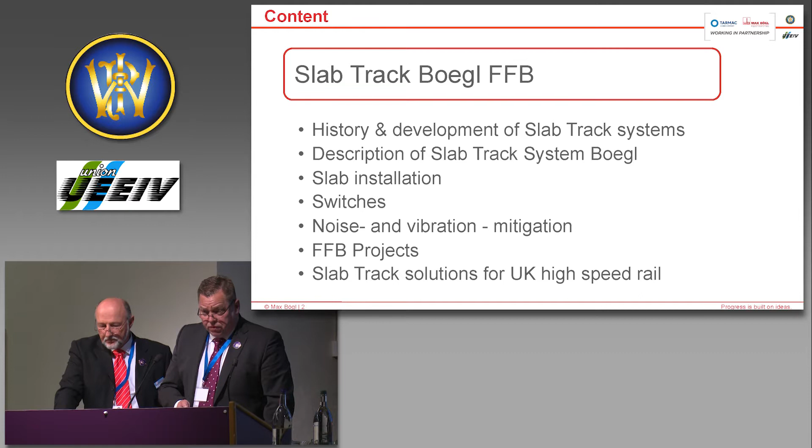Thank you, Steve. Good afternoon, ladies and gentlemen. History and development of Slab Track.

In the 1960s, the German railways thought about riding a little bit faster, but having better comfort and maybe less maintenance. So this was the start of development of Slab Track.

In 1972, the first section was built quite close to Rheda station, and it was a cast-in-place system based on sleepers filled with concrete.

The development was carried out by some companies, and five years later, in 1977, a demonstration track was built quite close to Munich on the line between Karlsfeld and Dachau. Different systems, some with sleepers and in-situ concrete, and also systems with precast elements, were tested.

Here we can see a very big picture. It was the section of this demonstration track built with precast elements, in a length of 430 meters. This is a picture after 15 years of use.

Quite a lot of other systems during this time have been renewed. This system is still running today, every day used by trains with a load of about 160,000 tons.

And we call it the mother of the FFB system, Feste Fahrbahn Bogl, because with the good experience of this system, the German railways asked Max Bogl, because of their knowledge in precast technology, to take up this solution and the brilliant experience from this test track, to update the system. And the FFB system itself was born.

Integrated rail seats, longitudinal coupling, and maintenance free - the track has worked since now more than about 40 years, with very good performance.

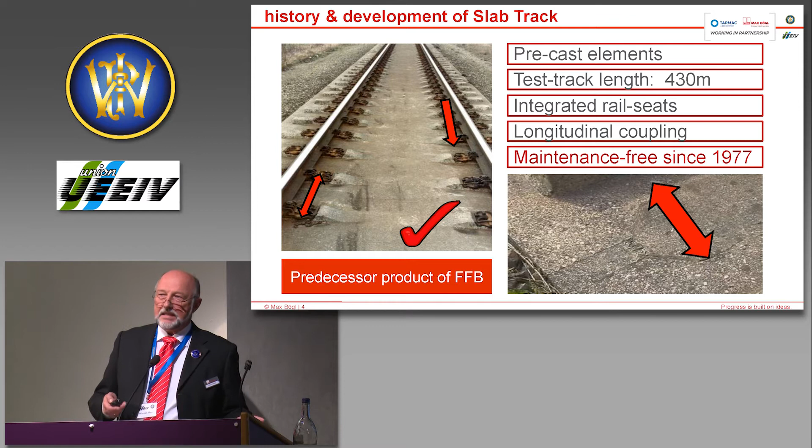And now I want to tell you a little bit more in detail about the FFB system - the description of the slab track system Bogl.

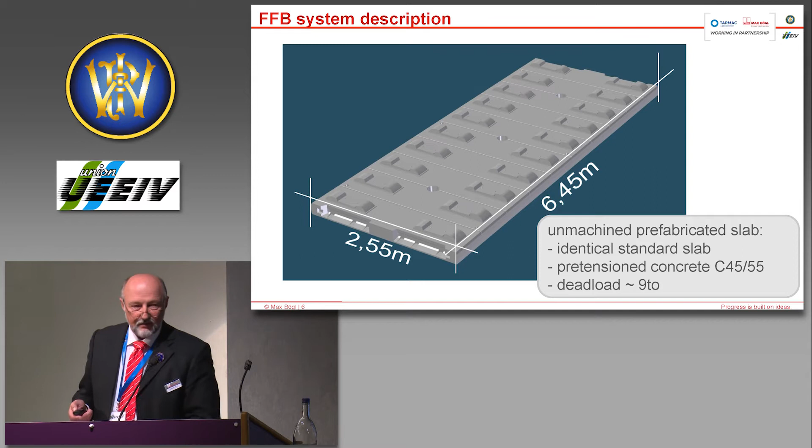The FFB system consists of precast concrete elements produced in a precast plant, with a length of about 6.5 meters and a width of 2.55 meters, with a dead load of about 9 tons.

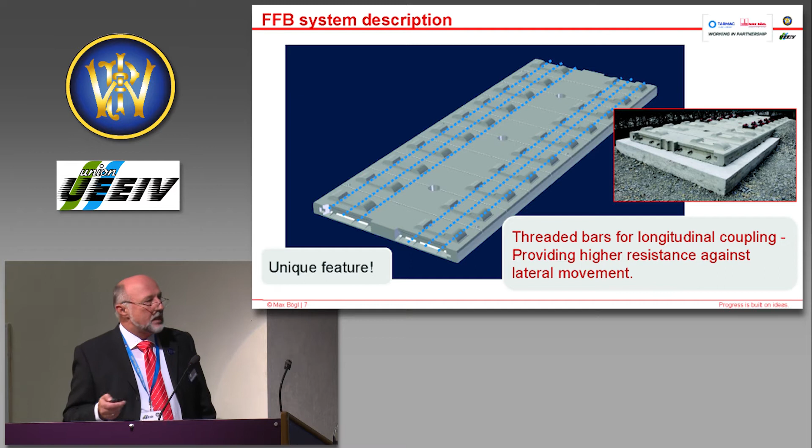As a unique feature, we have the longitudinal coupling, providing higher resistance against lateral movement, which is very important for the long durability of the system. And we have the pre-stressing in the transverse direction to increase longevity and durability.

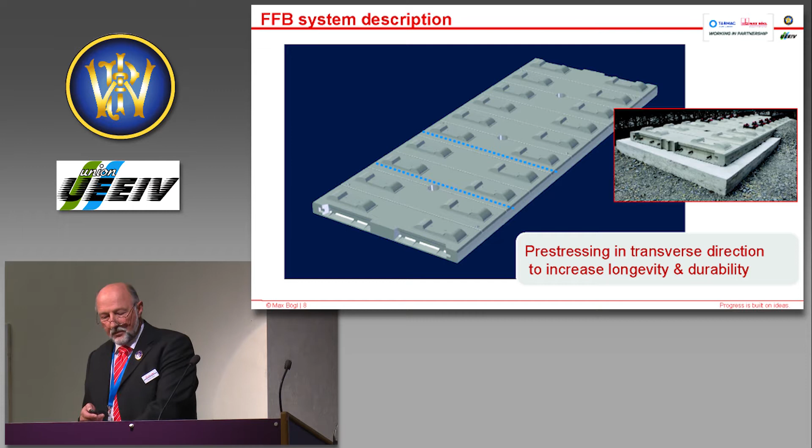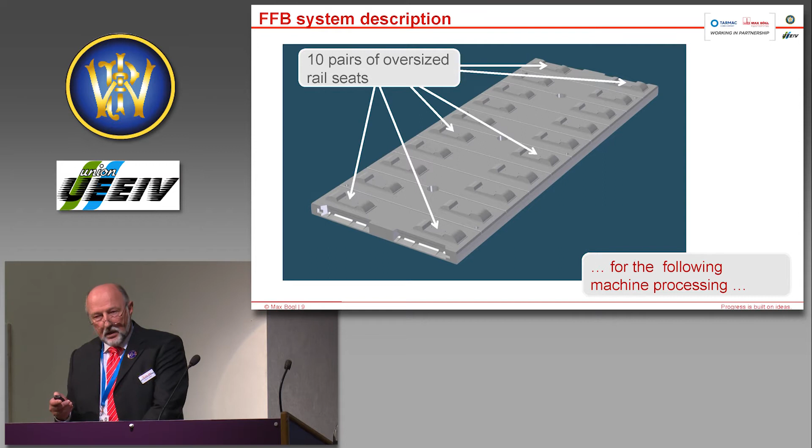Each slab has 10 pairs of oversized rail seats. Oversized because the following process, which is a machined process performed by a grinding machine, will work in this oversized area, which we can see here.

The unique feature is that we do not change the inserts in the mold to achieve a curve. No, we install the curve by a grinding operation. The rail seat geometry after grinding has a shape that exactly matches the track alignment.

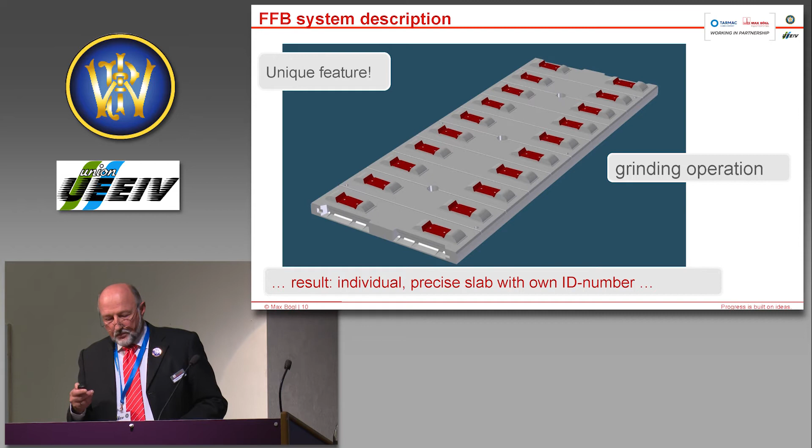The grinding process can be performed by fully or half profiled shape rolls. The amount of material to be ground off varies from a range of 1 millimeter to some millimeters.

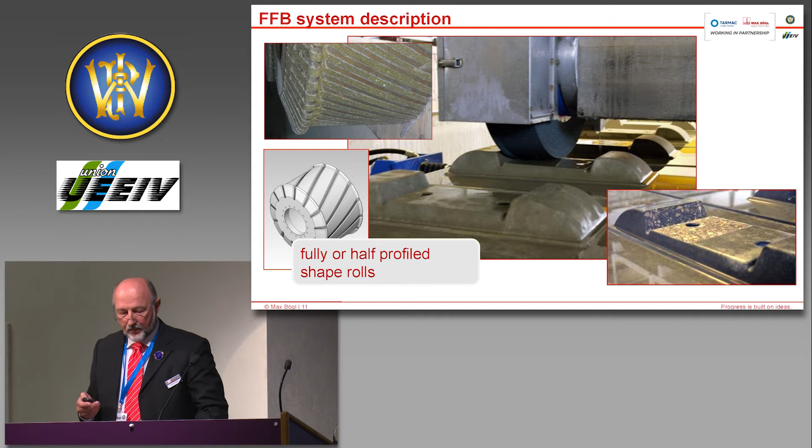For quality control, after grinding, each slab and each rail seat will be measured by a laser scanner and checked to confirm the grinding rate is in the expected range. All the data measured by the laser scanner will be stored for quality control.

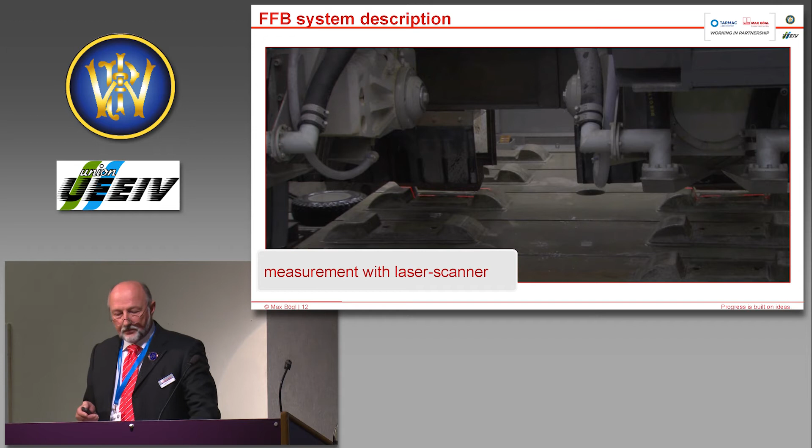Because now we have a unique slab with the geometry of a special part of the track, this slab gets an ID number, and this number will be applied, as you can see here, by a small robot.

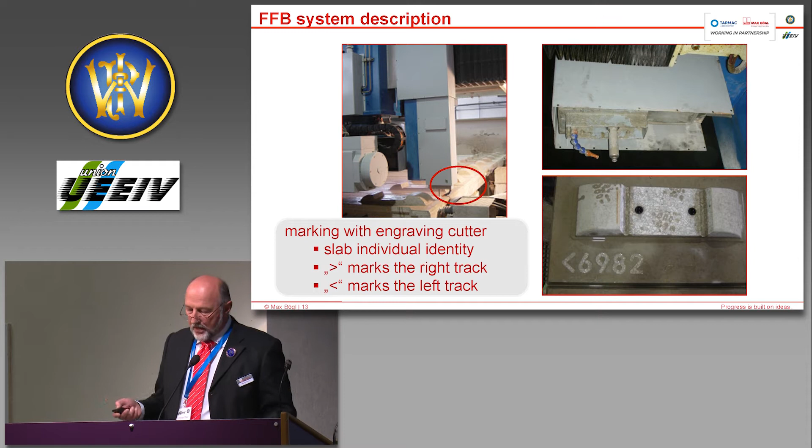But how do you bring a some kilometer long railway line to a segmented track? The basis is the track geometry given by the railways. This alignment will be used in all following processes as a basis.

In the planning process, the track is broken down into pieces with the length of the slabs, and so for each place on the track a slab will be designed. An individual data set is generated in the FFB software for each slab.

The data will be used for the CNC grinding machine and also later for the slab laying and adjustment on site. The data can be stored

also in the BIM model of the railways. So the software of the FFB system can work together with, or be part of, the BIM model of the railways. FFB is BIM ready.

Now, ladies and gentlemen, you may ask yourself if it's only possible to install continuously, starting at one point and going on to the end of the track. No - because of the design segmentation, at each necessary place installation can be stopped and continued after a gap.

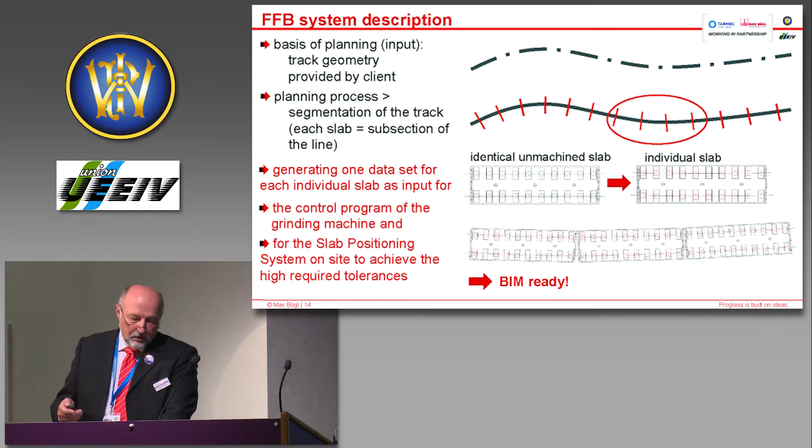For example, because of a bridge still under construction, or for logistical reasons to cross the track for transportation, a gap of 5 to 10 slabs can be kept open, and the installation continues.

As soon as the transport opening is no longer needed, the gap can be closed, and the accuracy will be the same after closing the gap. Everything will fit.

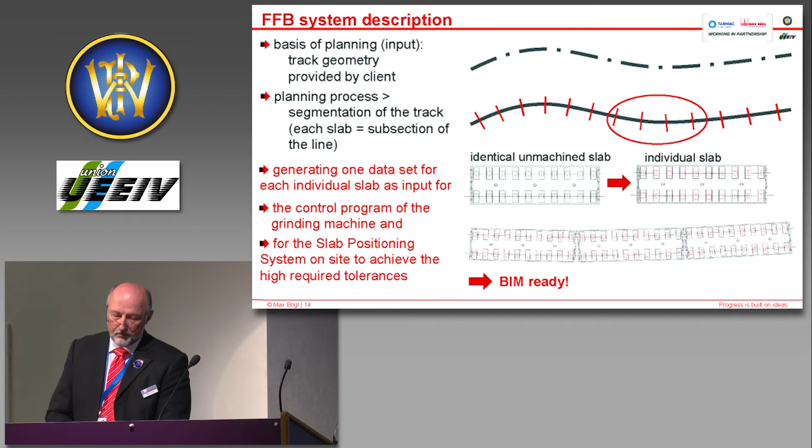Here we have a nice view of such a curve section. We see the polygonal arrangement of the slabs and the continuous shape of the curve ground by the CNC machine. The accuracy of this grinding process is very high.

The performance will be executed with a tolerance of less than 0.3 millimeters. So at the end, you will have continuous support for the rail with the best conditions to ride very fast.

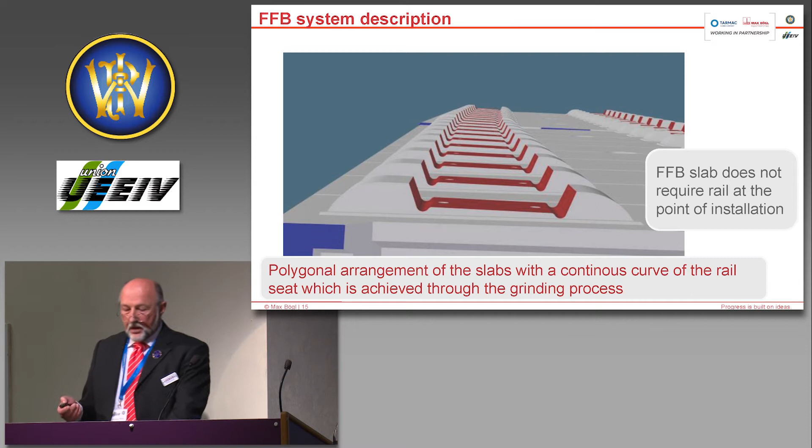Only the fastening system will be installed in an assembly process as the last step in the production before storage. The fastening system for high-speed use consists of dowels installed in the concreting process, the elastic intermediate plate, the steel plate, tension clamps, screws, the rail pad on top, and the angle guide plates.

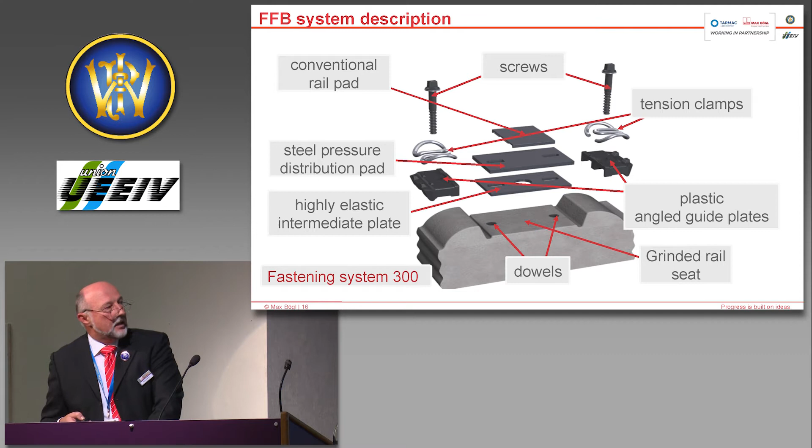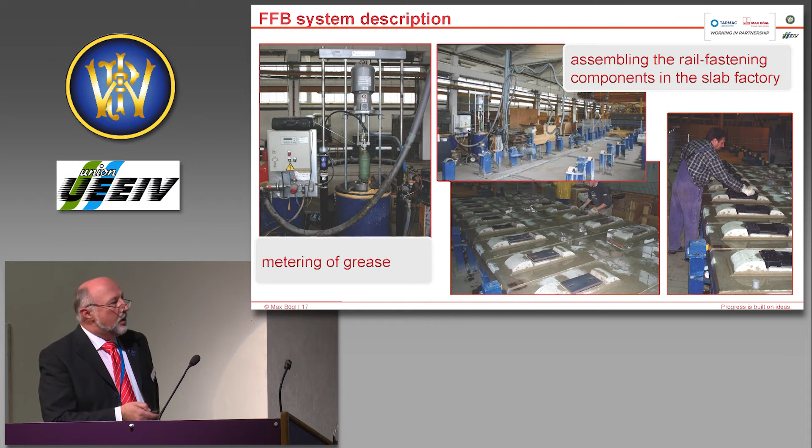This is the assembly process in the plant: the installation of grease as a protection against corrosion. Now the slab is ready assembled and waiting on the storage area for the call of the site.

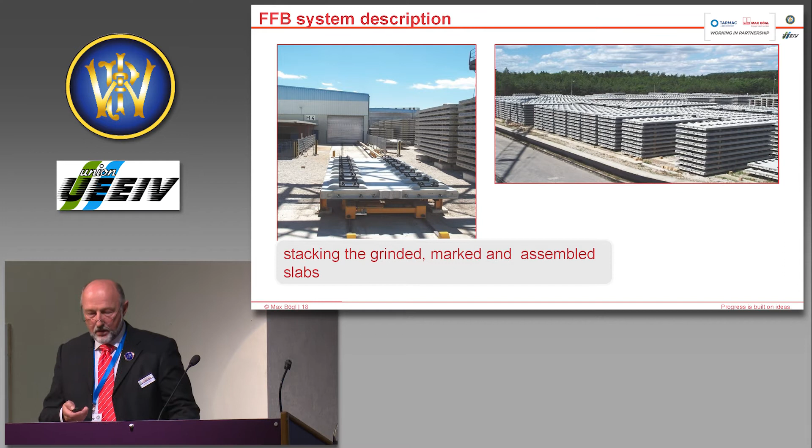The call can, for example, be: in 3 days we need slab number L for left track, 2708, and the following numbers. But this call needs some work before.

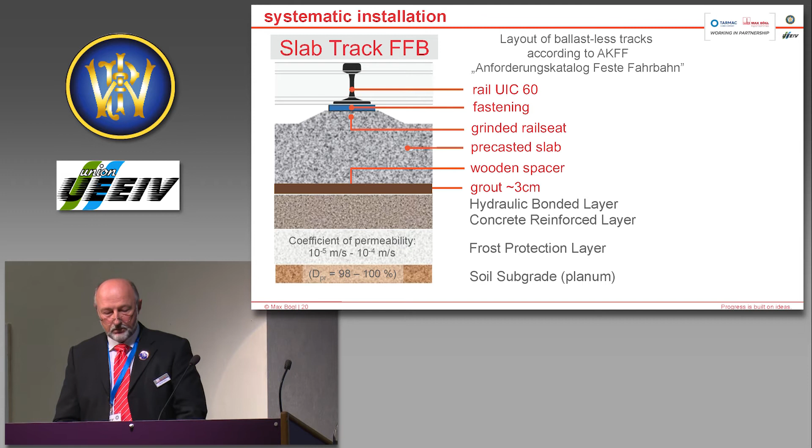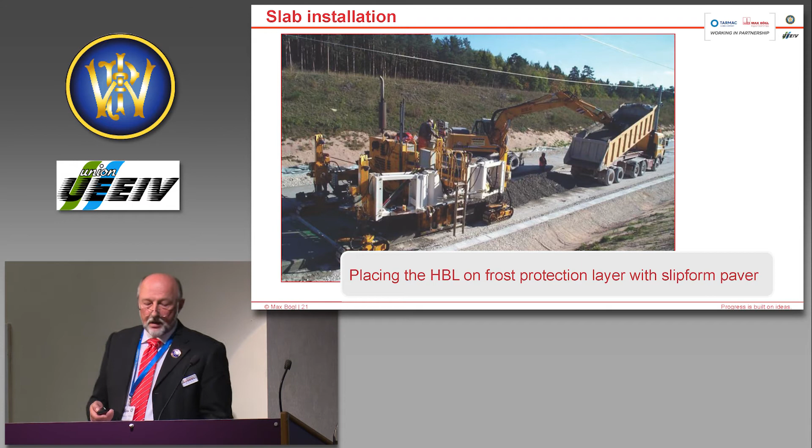And now, as a last step, the rail will be installed. To have a look on the side, you can see the slip form paver installing the hydraulic bonded layer on top of the frost protection.

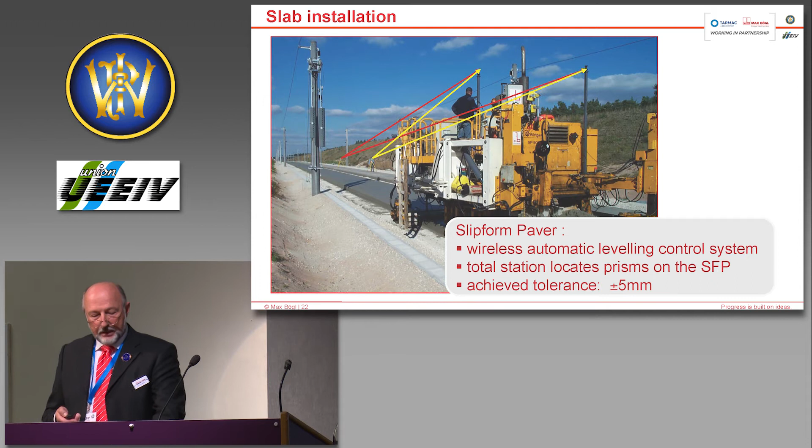And then, after the survey process, the position of each slab will be marked on the HBL, and the gantry crane will lay down each slab at its special place, according to the position plan and the ID number of the slab.

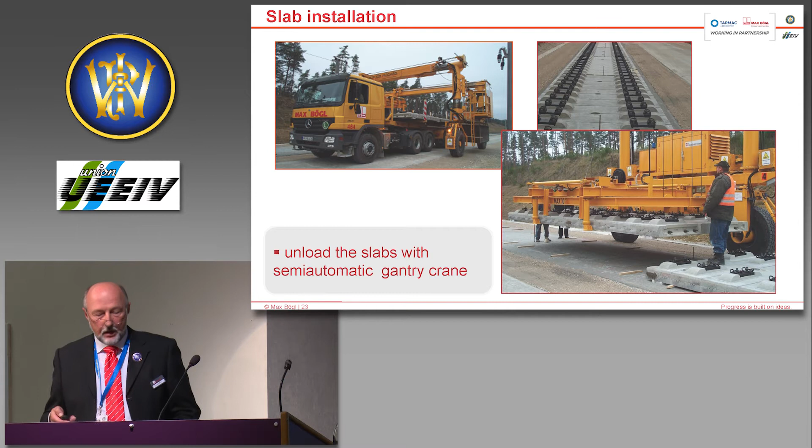A survey team will work with the slab positioning system and a total station and the software behind, adjusting each slab according to the necessary accuracy.

And here we are again in the range of 0.3 millimeters using the data we have stored after the grinding process, so we will have no additional failure in the process. We will start with the track alignment, go into the grinding process, use the accuracy after grinding, and jump into the installation process, always using the same data.

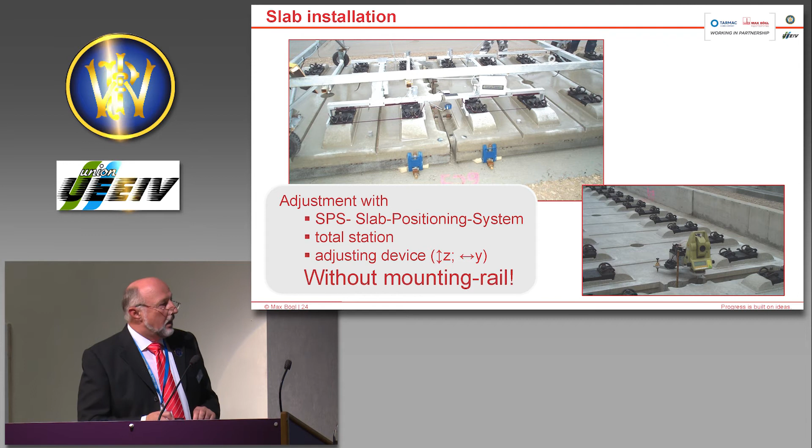To fill the gap between the hydraulic bonded layer and the bottom of the slab itself must be fixed and the gap must be sealed, what we do with a cementitious mortar.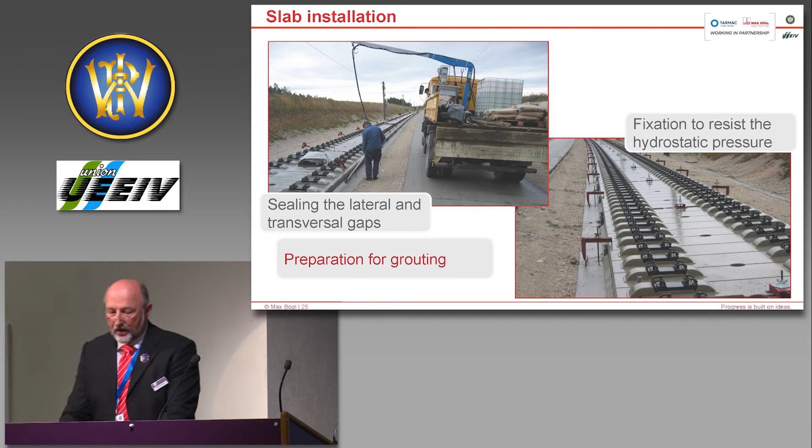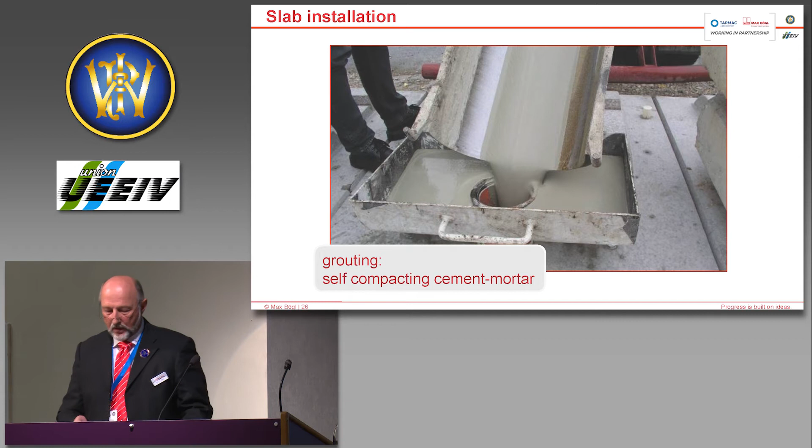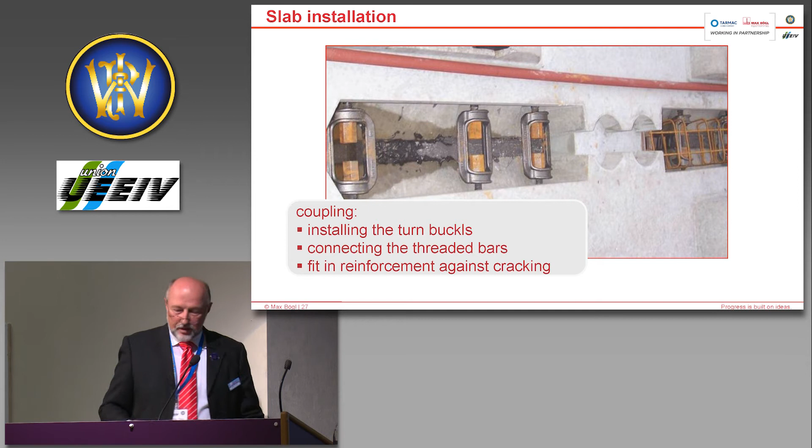Then the self-compacting mortar will be filled in, and as a last step, the threaded bars installed in the slabs will be coupled with a turnbuckle and special coupling devices. Some reinforcement will be put into this gap area to protect against cracking.

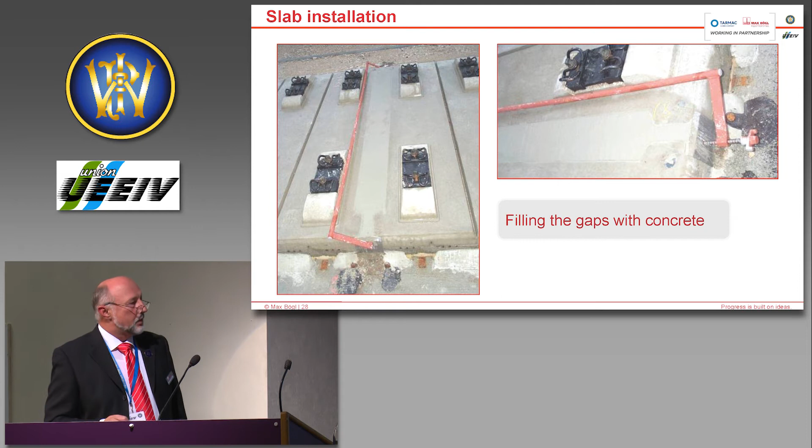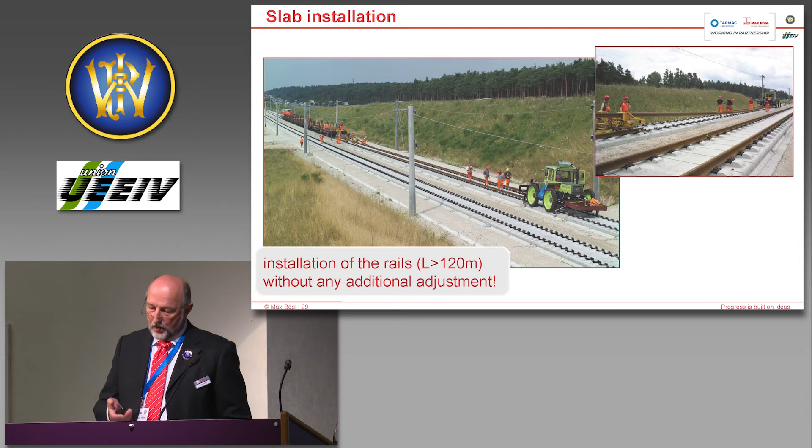And in the last step, this gap will be filled via concrete. Now we have a more or less endless concrete band with high durability, waiting for the installation of the long rail on top, and as a last step, by welding, the continuous welded rail will be performed.

The precast FFB system is also suitable for switch areas. From the design of this switch supplier, all the data for the fixation points will be taken and the geometry will be transferred to transportable sized slabs.

Here we use not only the grinding machine but also the CNC technology for drilling the fixation points into this prepared slab, and at the end we will have the slab positioning plan for the adjustment on site.

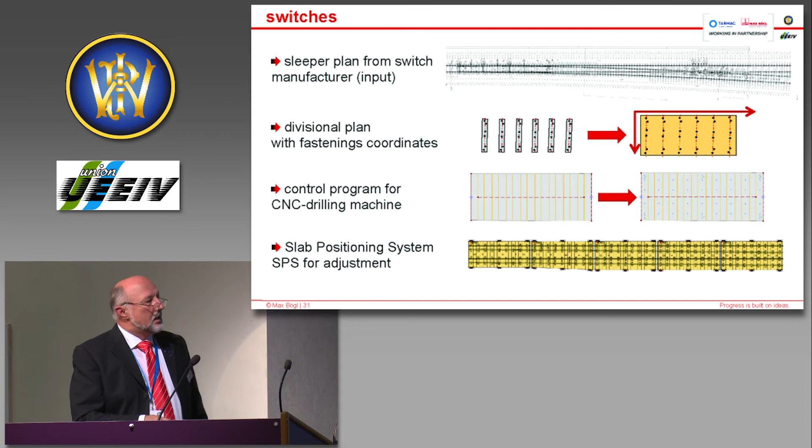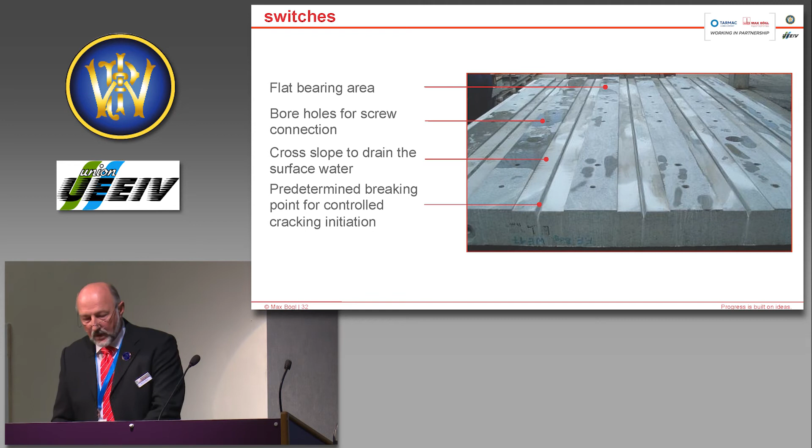So it's not necessary to prepare the switch components with sleepers. The elements are very small. You can see here, the transport is quite easy and very economic.

And after installation on site, because of the high accuracy of the CNC drilling, no additional adjustment of the steel elements after installation is needed.

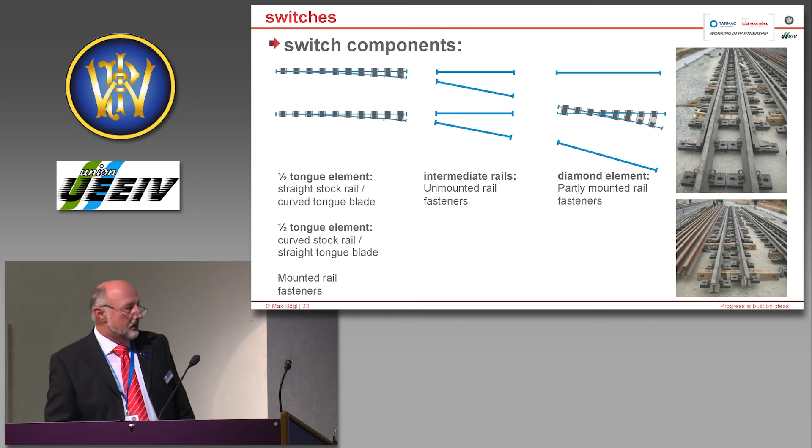We have heard quite a lot this morning about the need of noise and vibration mitigation, a very important subject. What is necessary to prepare such a system? A pretty good calculation and also a pretty good measurement of the real situation.

So latest in, for example, a tunnel, in the construction of the tunnel, some measurements have to be performed to define the transfer rate from the tunnel to the buildings on top. According to this calculation, for example, a mass spring system with a frequency of 11 or 12 Hertz can be designed.

Here we have an example of such a system performed in the Katzenberg tunnel in Germany. We have a tubing element the tunnel is constructed of, we have the filling concrete, we have the sidewalks, and then we have the track work area. At the bottom, an elastic material, on top the mass.

The FFB slab here works together with a reinforced concrete layer as a mass, and together with the elastic material, this system works as a floating system.

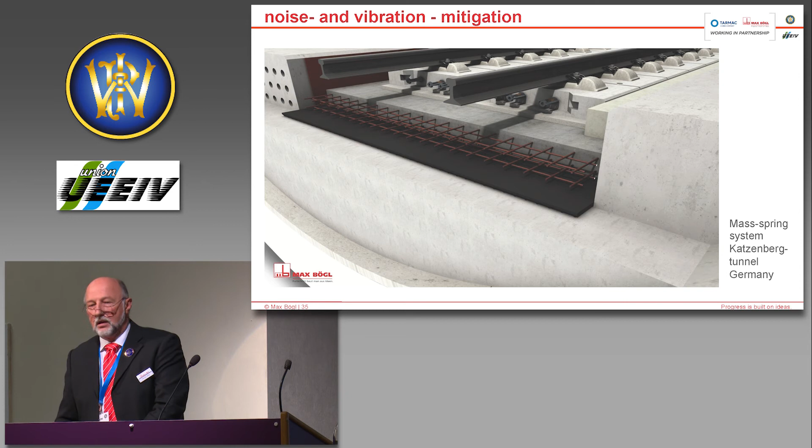Another solution can be to use thicker slabs. Here this slab was performed with a thickness of about 50 centimeters. Given the mass for the mass spring system, the elastic material is glued on the bottom of the slab, and below there's underpouring concrete. Quite a lot of solutions are possible, but the acoustical engineers have to perform pretty good work before giving all the information to the supplier of the elastic material and to the designers of the mass itself.

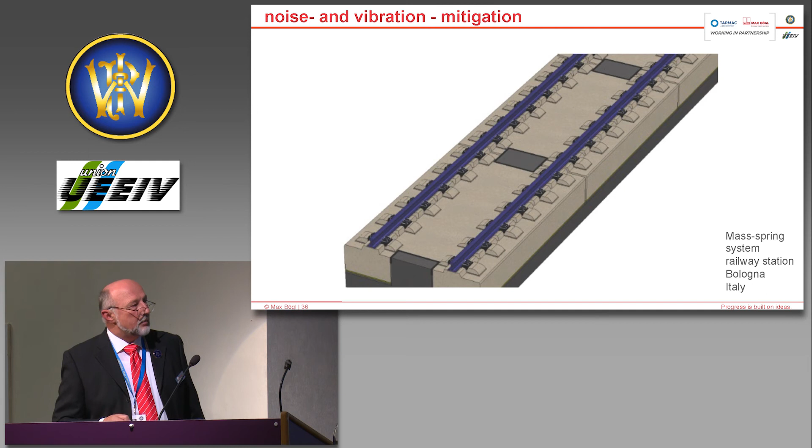Now I want to jump to the world. Some projects performed with the FFB system around the globe. In Europe, about 200 kilometers. Most of the installations have been performed in Asia, in China, with more than 10,000 kilometers. That means more than 1.6 million slabs already have been performed there. It's quite a lot of experience, and because of this long installation section, the FFB system meanwhile is the most used system in the world.

Also, about 340 switches, with again the amount of 8,500 slabs for switches, have been performed, with best results after installation and use by the train.

At this place here, I want to hand over my mic to Steve again, who will tell you something about the Slab Track solutions for UK high-speed rail.

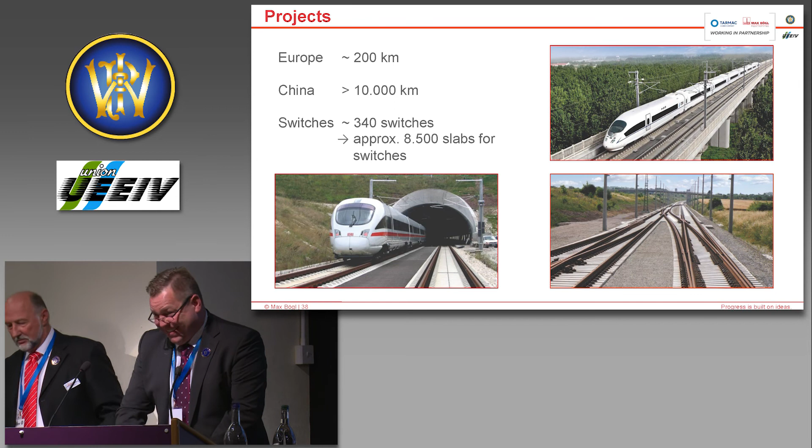Thank you, Werner. I'm glad you handed over the mic and not over to Mike. We might have been in some trouble there. Okay, so what have you done to this? Doesn't work any longer. I killed it. Is it time to go home? You've got 5 minutes. Yep. Done that. No, but I know somebody who can. Now it works. Okay, thank you, thank you. Thanks a lot. Okay, thank you.

So the partnership of Max Bögl and Tarmac is a couple of years old as far as Max Bögl and Tarmac are concerned. We launched as a joint venture earlier this year, and we very quickly just wanted to explain some of the benefits of the partnership, because as I alluded to earlier, the solution for UK high-speed rail will be a full turnkey solution.

So therefore, we needed not just to have the technical expertise of Max Bögl, but we also needed to think about some UK support, which generally is the model that Max Bögl apply to their overseas, as far as German overseas is concerned. So the partnership allows the proven technology of the FFB system to be produced in the UK, and should we be fortunate enough to be manufacturing and supplying to the UK high-speed rail market, that's what we're going to do. So we're going to be using local labour for manufacturing, transport, which is a very important one, planning and installation, and even maintenance.

So we'll ensure we can manage the environmental impacts. We'll obviously look at all of our sustainable material sources. We'll manage all carbon footprints of the installation. We'll utilise BSI-approved management processes and systems, and we're going to look to reduce product supply and manufacturing costs as a result of doing it on British soil. So the benefits also, very important, are the off-site manufacturing.

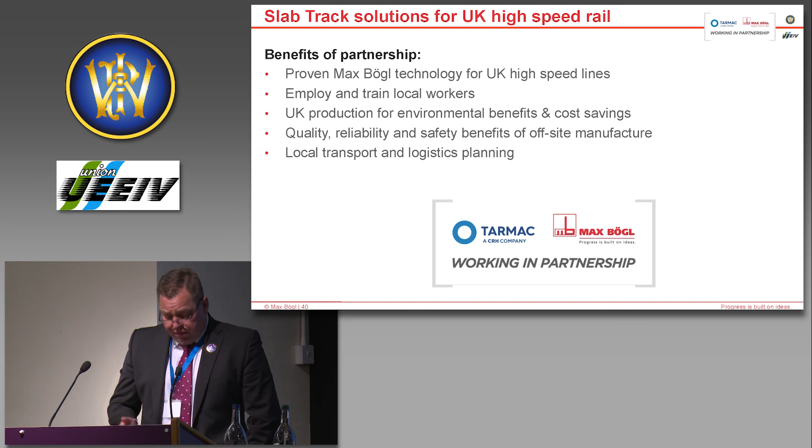Obviously, transport management is a big one. Sorry if I just come back to that. So essentially the solution for the UK is engineering and design, manufacture, transport and logistics, and installation and supervision, so that's very important to know. Moving on.

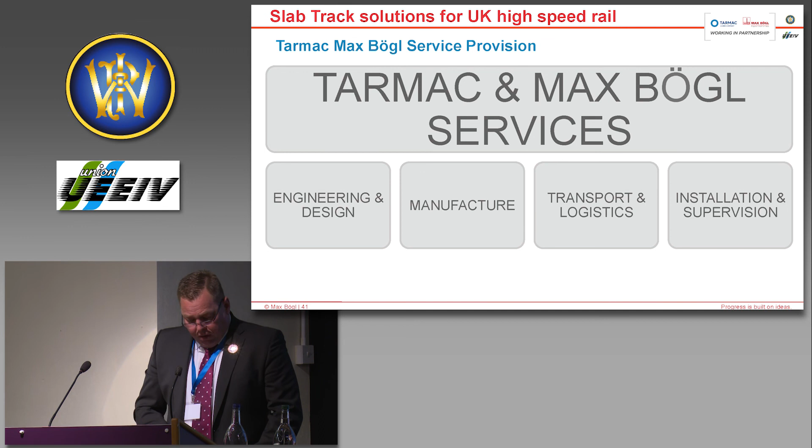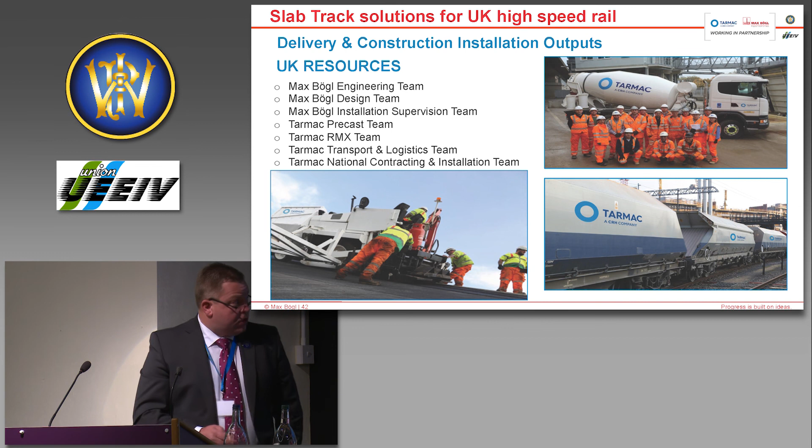So it's going to be an integrated solution, as I say. So we've got the support of our assets in the UK, also our ready mix, both technical and production expertise. Transport and logistics is very important to us as a business, which I'll just touch on very briefly. We have a large fleet of vehicles, over 1,700 vehicles in our fleet, 25 trains and sets. We are one of the largest movers of materials in the UK on our British network.

And I just wanted to give you a very quick example. If we assume in the UK 100 kilometres of track, that's 15,500 slabs, which would need probably one line of manufacture with 30 moulds over 2 years to manufacture. That'll be 5,100 vehicle movements, or indeed 120 train movements, which essentially is one train per day. So that's obviously where Tarmac will bring its support expertise.

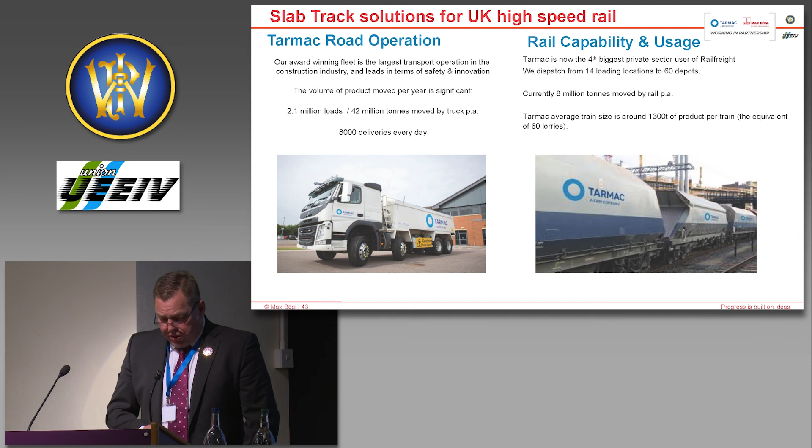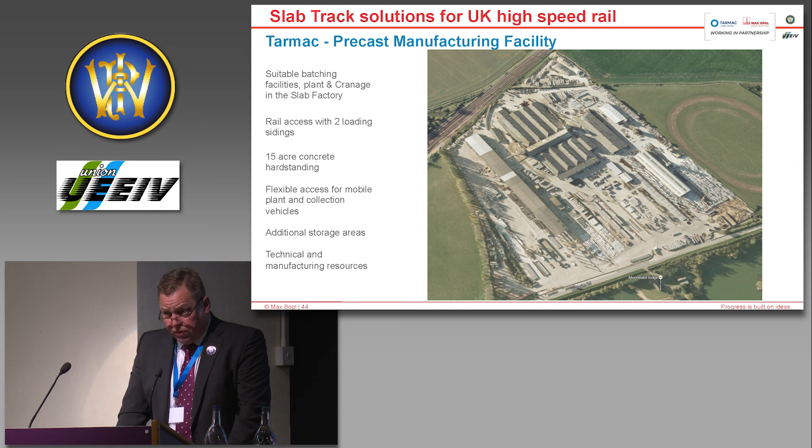And finally, manufacturing in Tallington. Tallington is, of course, well versed in the supply of rail sleepers to Network Rail, has done that for many years, and obviously from our Mountsorrel quarry as well, we've provided many a ton of rail ballast as well. So obviously bringing that full solution together in the UK allows us to, as said before, do the full turnkey for the UK high-speed rail sector. So thank you very much.